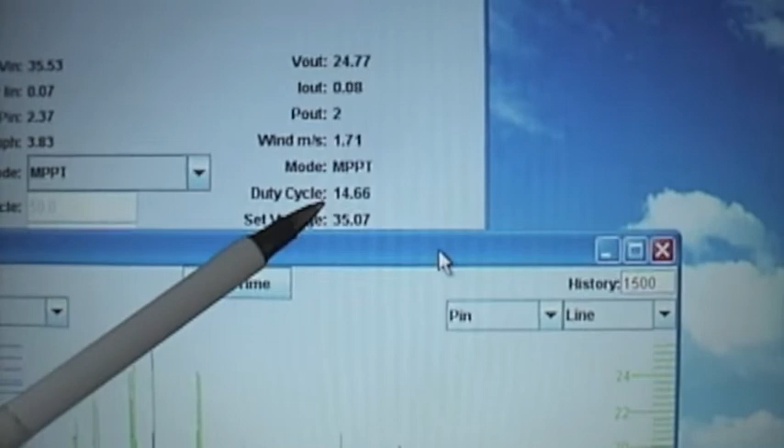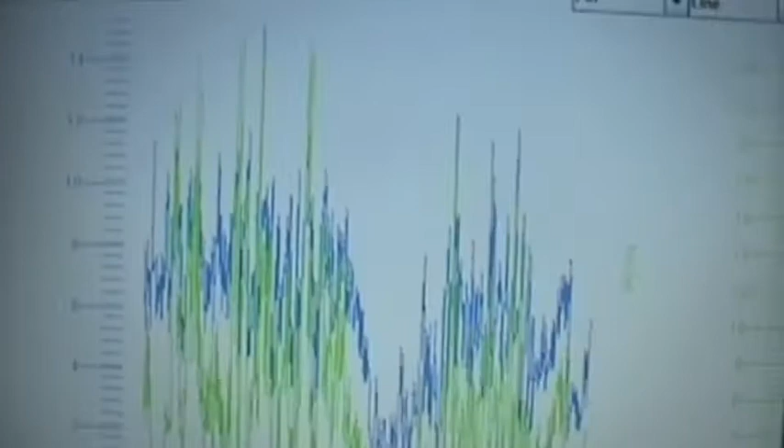And if the duty cycle is showing any kind of activity, we know we're pulling some power. We got 2 to 3 watts coming out into the 24-volt battery. We're in the MPPT mode. This is a chart of the last hour. So right now winds are 8. See, it just picked up.

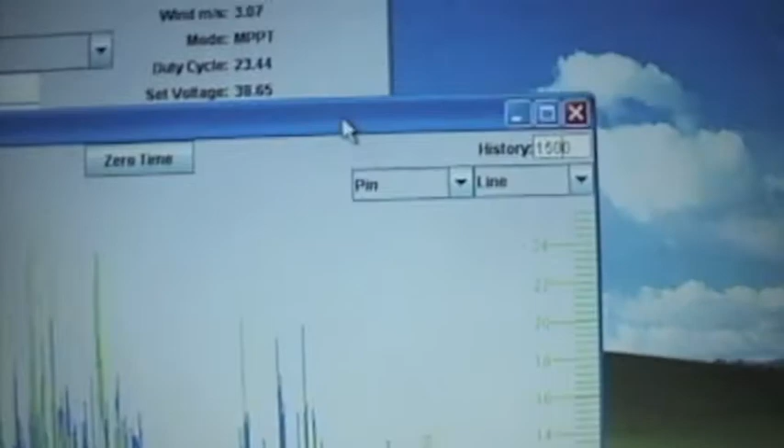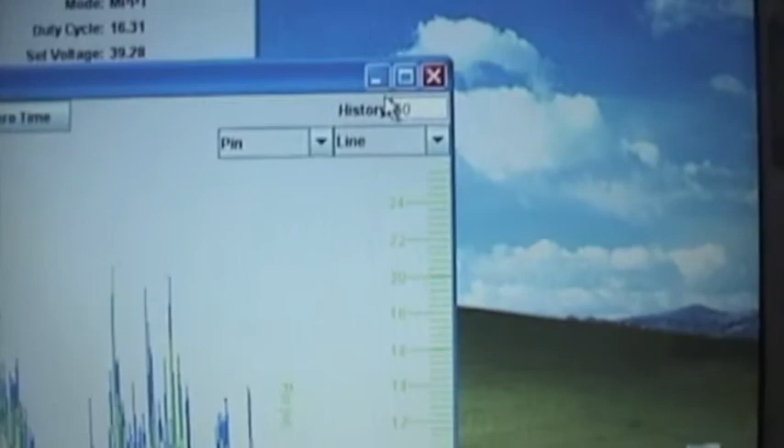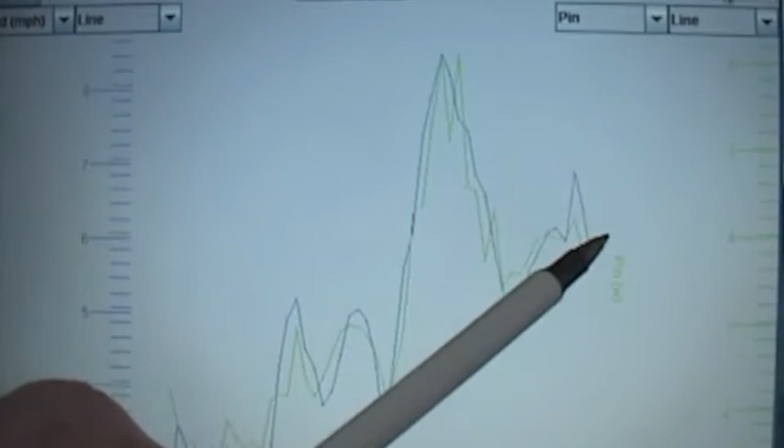I'm going to change the setting on this history, and it will show the chart as a little easier to see. Here you go. So right now winds are 7, dropping a little bit, watts.

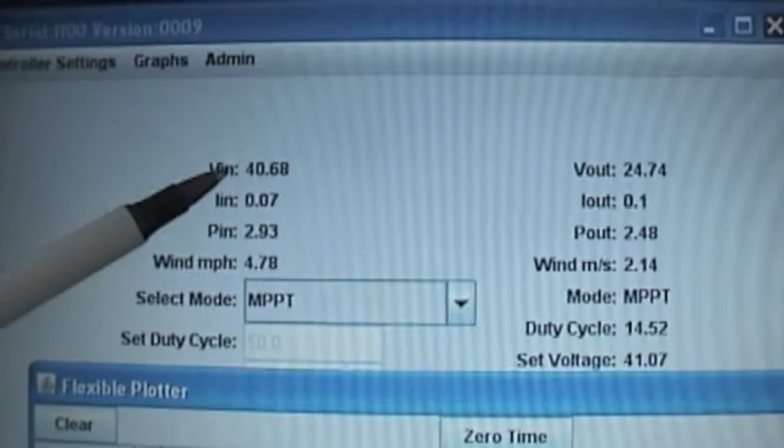And if you watch the duty cycle, you can see it's attempting to keep the turbine in its maximum power. So if the voltage starts dropping up here, if this voltage drops at all, it pulls less power. If the voltage rises, it'll pull a little more power.

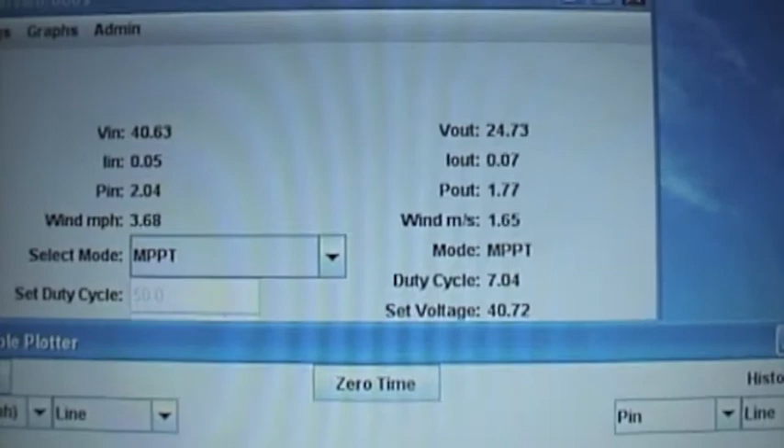So if you just keep an eye on the voltage and the duty cycle, you'll see it's trying to vary how much power it's pulling. And I've been watching it. Duty cycle actually kicks in right around 3 miles per hour.

Okay, I have the screen updating a lot faster, so you can kind of see how quickly the wind is changing. You know, we're in the 6 to 10 mile an hour range. And you can see the green line is tracking pretty tight to the blue. So the MPPT is doing a real good job. Duty cycle is about 30%. Input volts about 40.

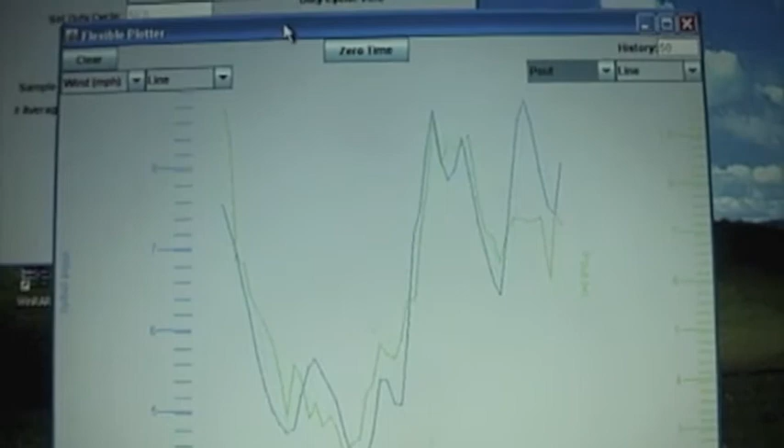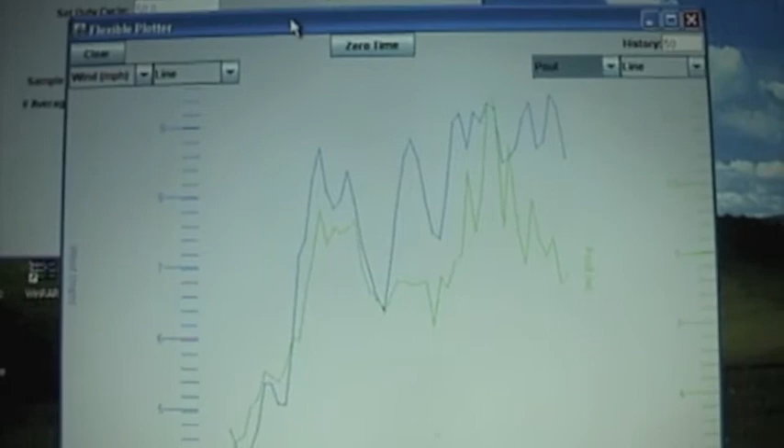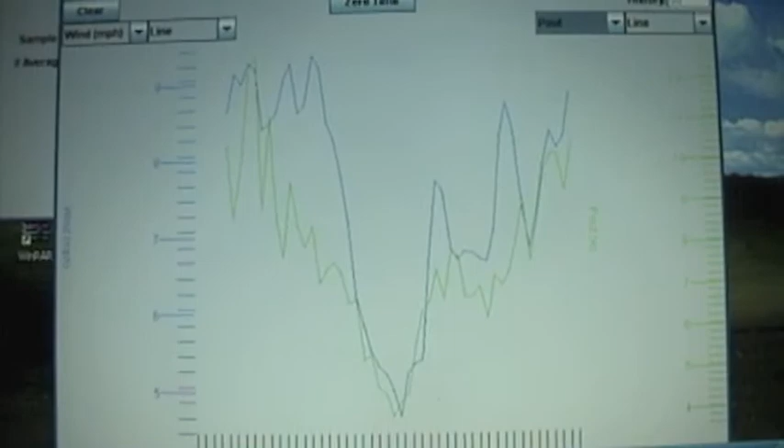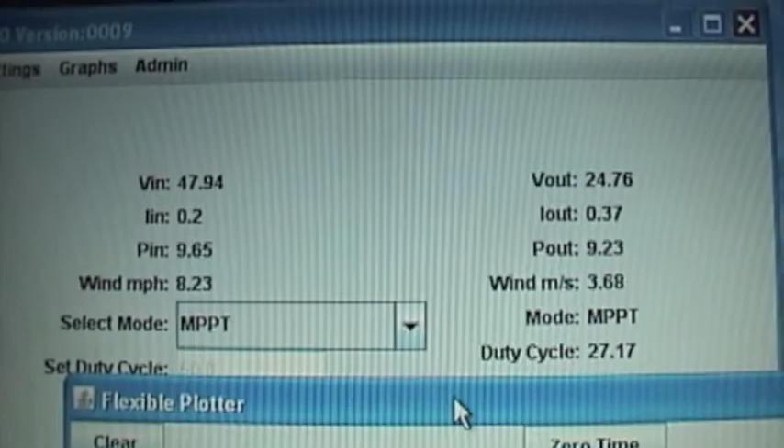Sometimes there's a little lag if there's a gust. Let's see up here. Winds are 9 to 10. Look at the voltage in, and the MPPT is trying to keep that constant by adjusting the amount of power it's pulling. So if it drops a little, the duty cycle will drop. If it increases quickly, the duty cycle will increase.

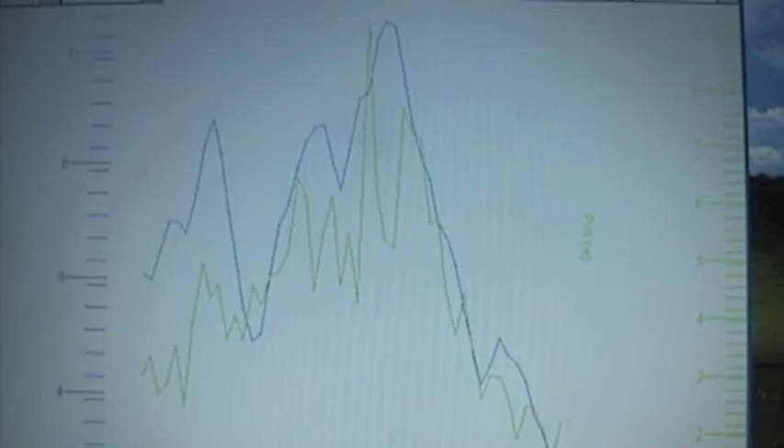So this is the problem with wind turbines: the wind is really a lot more erratic than you think. The power can change dramatically in just a second. So at the moment it's not very windy, you can tell. That wind speed meter is barely turning. This turbine just seems to go, it doesn't stop for days.